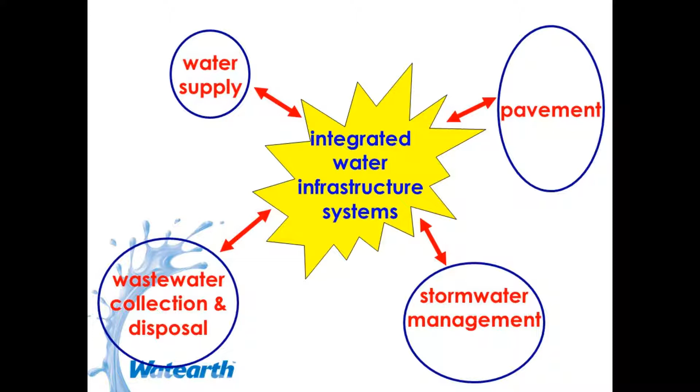I'm going to start with the Los Angeles Zoo. I won't go into a lot of detail, but it's a very fun project, and it illustrates the one water concept and really how to be sustainable in all aspects of water resources.

It's a very iconic place, located next to Griffith Park, in a kind of hilly area, and discharges to the Los Angeles River. Watearth was involved in the vision plan, which was really very fun. I got a lot of behind-the-scenes tours of exhibits and things that you never know actually happen or go on when you're not at a zoo. There's a lot of mechanical and civil systems that you don't see when you're just there looking at the exhibits.

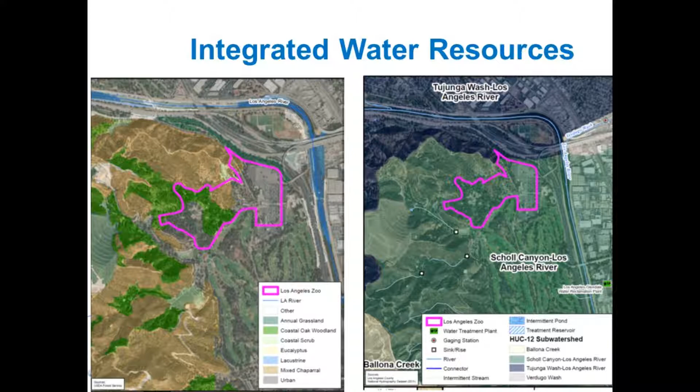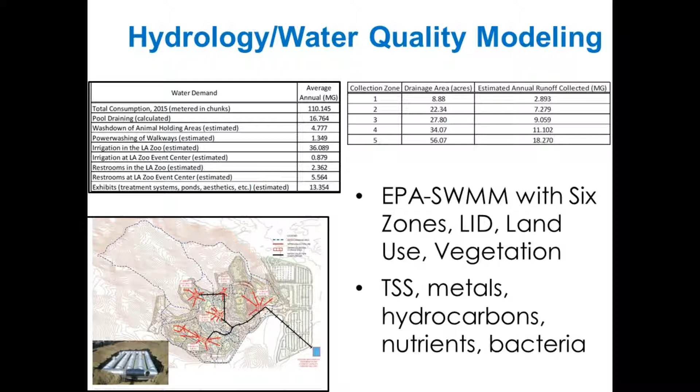So we're now in the EIR phase for CEQA, and we're not too far into that, so I can't share a lot of results right now. I'm going to focus more on what was planned in the vision plan. Basically the idea was to take the zoo and divide it into 6 zones or drainage areas, and try to capture all of the stormwater runoff from the zoo, then store it underground and ideally reuse it for irrigation or other needs like toilet flushing within the zoo. There's actually huge potential for that there, but potentially discharging some with treatment or to the water recycling plant. Any stormwater that's just discharged needs to be cleaned up and treated before it goes into the LA River.

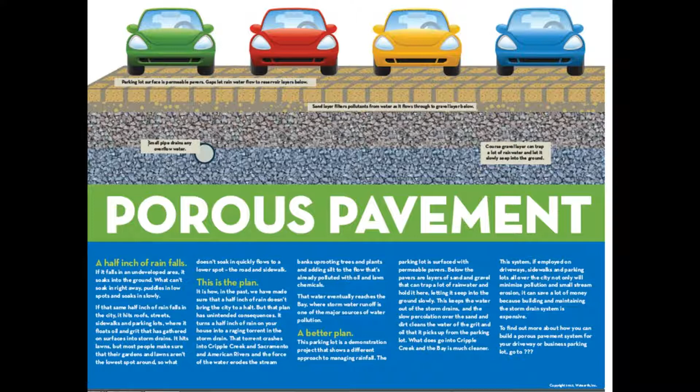So the existing parking lot actually already has LID features. It was recently upgraded, so it has porous pavement. This is from an interpretive sign from a project we did in Citrus Heights in the Sacramento area. But in any case, they've already got kind of a start towards that sustainability element.

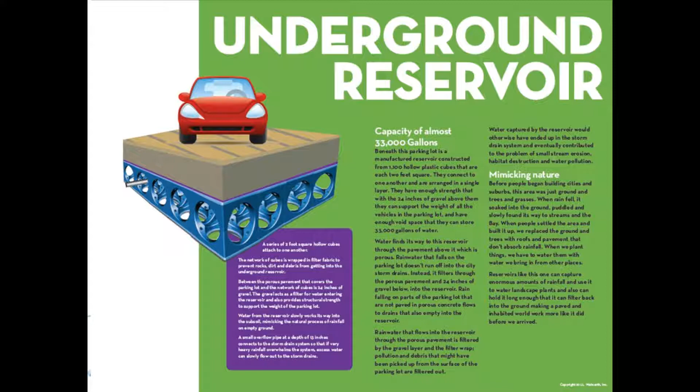This is the existing site I mentioned, so it has permeable pavement and bioretention. It's really ideal to leverage that and bring the sustainability and resiliency. I might not say resiliency a lot today, but anytime we use low impact development or these multi-use features, we're really building resiliency into a project. The soils within the zoo are actually pretty good in terms of if we want to infiltrate. The idea is first to try to reuse the captured stormwater on site, but potentially there might be some infiltration.

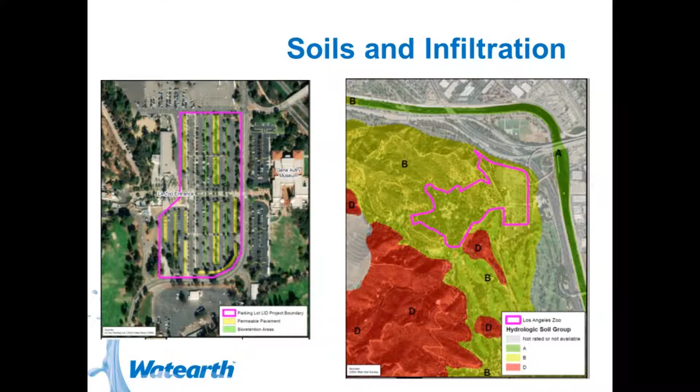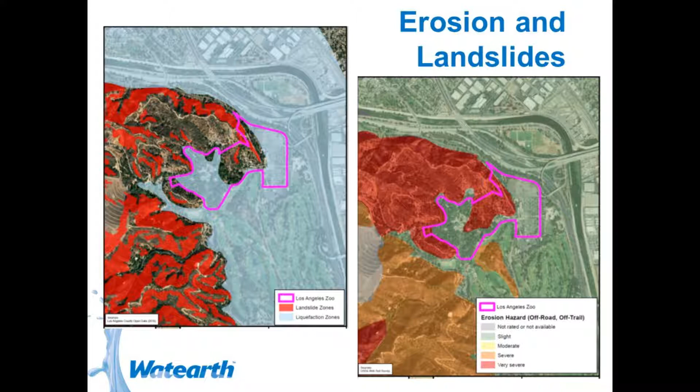So it is pretty hilly. The erosion potential might not be as bad as we thought. They're looking at the geotech right now, but it's potentially underlain by bedrock. So we'll see on that.

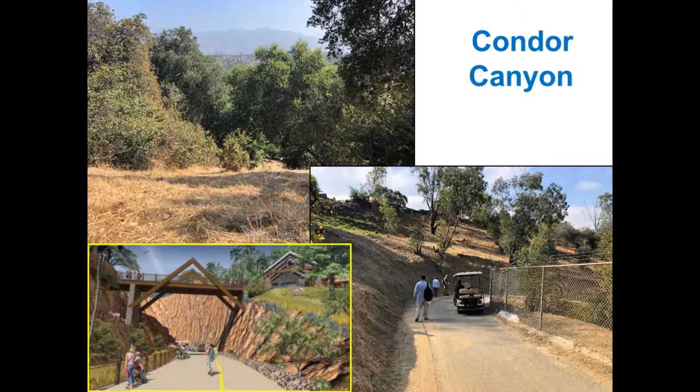All of the facilities, like where they have pools or tanks, have different operating protocols. Some of the pools, like the Hippos, are very dirty, so they get emptied every day. Some pools, like the Lions, not so dirty, so more like weekly. Some can even be on an annual basis. So they all have different operational protocols based on how clean or dirty the water is.

Animals that are on life support systems - it's not what you think of for life support, like a hospital. It just means the water is highly filtered, not that dissimilar to drinking water or even stormwater filtration on the industrial side. That water tends to get saltier. It's a little bit harder to reuse for irrigation or other needs, but it's also constantly recirculated. There's also USDA regulations that don't really allow recycled water to be used in those types of exhibits, so there's some regulatory complications we'll be working through.

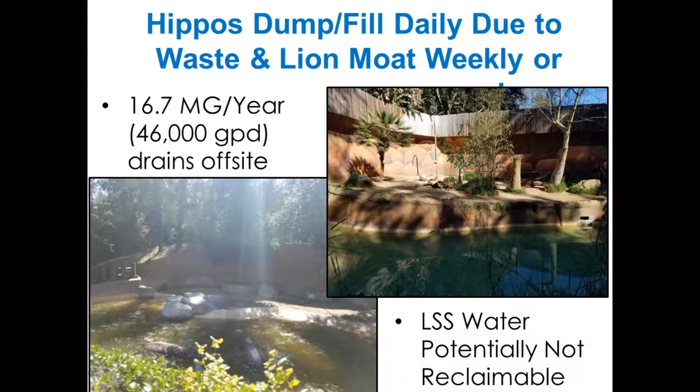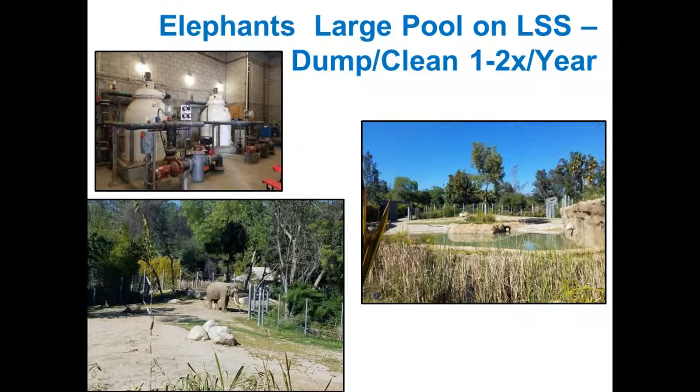Here's some of the mechanical water-related equipment behind the scenes in the elephant exhibit. The waterfall just recirculates. So they're already doing some things that are pretty sustainable in treating and reusing the water, but there's definitely more that can be done as the zoo redevelops.

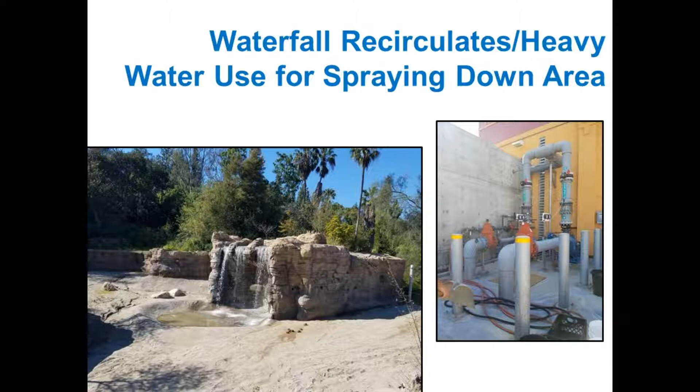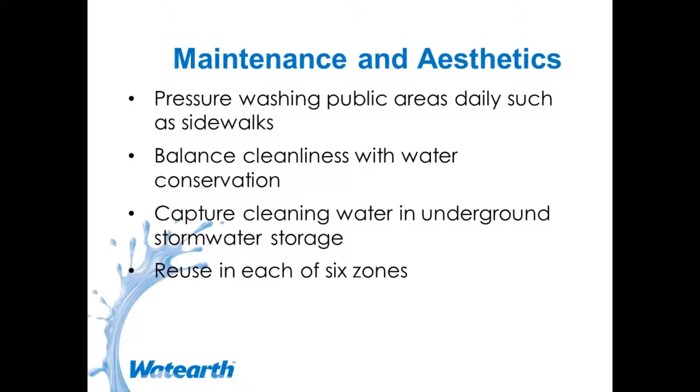It gets really dirty, like the sidewalks have to be hosed down, both because they're potentially dusty, but also you have a lot of traffic, spills and other things. That water currently is just used for cleaning once and then wasted. So with the stormwater capture concept, even the cleaning water would be captured.

And then irrigation - while we're all used to wanting low water use plants or a mix of low and medium, maybe a teeny bit of high water use, in a zoo environment they're really trying to match the plants to the exhibit. So in some cases you might not really use a desert plant or an adapted California plant - it may be more of a tropical plant.

So looking at increasing the efficiency of irrigation, where can we use either recycled water that's available or stormwater that's captured and treated on site. Excess irrigation water is an important potential stormwater runoff pollutant issue, because anytime we have excess irrigation running off, it's potentially carrying fertilizer and other nutrients. So there's some management items as well.

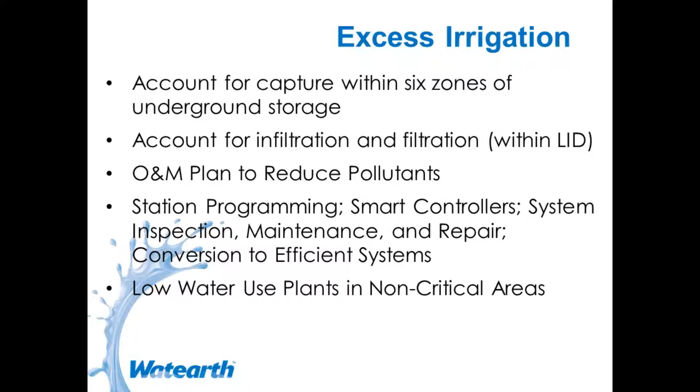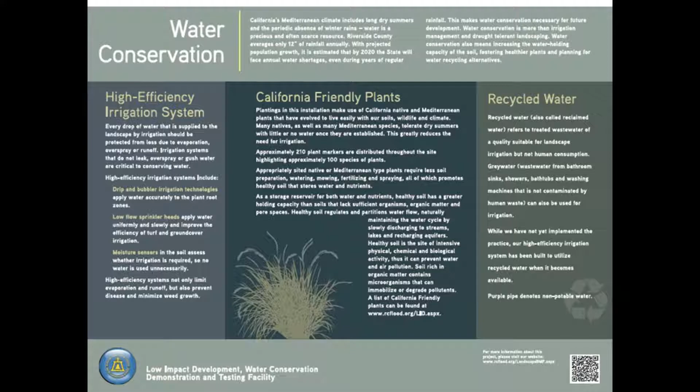But from a water conservation standpoint: high efficiency irrigation, low water use plants where it makes sense or California friendly, and then recycled water or captured stormwater.

This interpretive site and bioretention element is from the Riverside County Flood Control District. This is a demonstration site that's won probably a dozen awards now, and they just recently won an additional ASCE award for retrofitting the site and continuing to monitor it.

Elements like communications, graphics, and interpretive signage are really important components of these types of projects in terms of educating the public. It also helps, whether it's a public agency or a private client or Cal Poly, it can help to brand what the agency is doing that is sustainable and resilient.

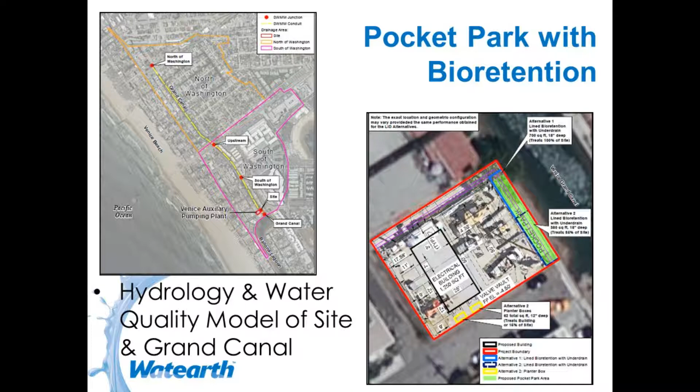This is a site level project in LA, but it has watershed level significance because it's at the confluence of the LA River and Arroyo Seco. It's called Confluence Park Phase 2.

Phase 1 was done a couple years ago, it's been constructed. Phase 2 is basically in a cloverleaf of an intersection. So this is up on a bridge looking down at the site. Unfortunately, for stormwater, it's being used as a staging area right now for sanitary sewer pipelines and improvements.

What that means is we've just finished community outreach and we're now moving into preliminary design. Available geotechnical data is not that great because it's not accounting for the compacted nature of the site. So we do need site-specific geotech, but it also means we're starting with a very compacted site.

So we have to look at not just what's going on in the upper layers, but also further down, especially because we're looking at opportunity for stormwater capture and whether it can potentially be infiltrated or maybe reused on site. I don't think the water budget's going to work out for that, so we'll be trying to look at infiltration if we can.

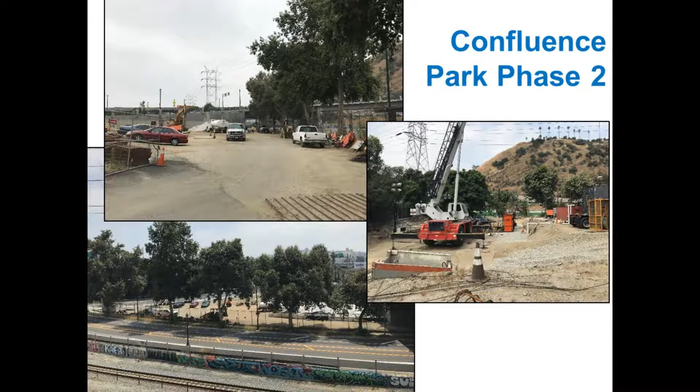Basically, this is kind of a sculpture area. The existing park is over here, and then these two segments of the proposed park are located in here. You can see on the historic FIRM map where it is in relation to the river. So it's super highly urbanized, but it's a great opportunity to provide outreach and connectivity for the general public.

Most likely the heavy users might even be bicyclists who are riding the LA River Trail and stop off to fill at the water bottle stations.

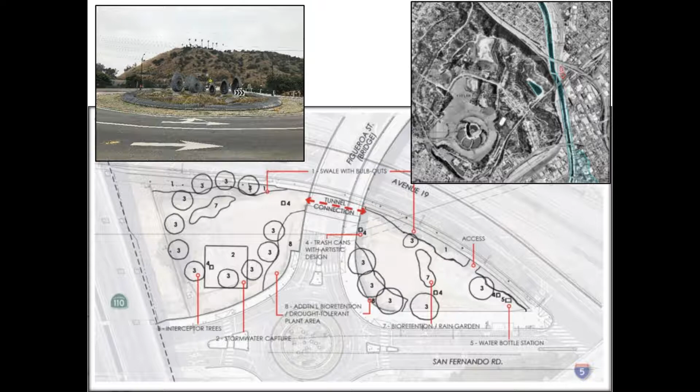Up in the Bay Area, Oakland Fire Station #1. Again, this is very site specific, it's a retrofit at a fire station. But the whole reason this project came about is that there was a water quality violation, and so this was kind of negotiated as part of their MS4 permit agreement to do this project.

So it has an important role in runoff from this site, but it plays a greater role in even just education of city staff and improving water quality within the watershed.

So when we talk about resiliency, there is sometimes a need to design redundancy into features. So this is a permeable pavement driving lane, and it actually ended up being less expensive than traditional reinforced concrete to carry the fire truck load.

But we also know the city expects the fire department to do all the maintenance. Well, the fire department is not going to get out there with the vacuum sweeper, which is what needs to be done periodically. So this permeable pavement could clog at some point if not maintained, and we kind of don't think it's going to be.

So there's a slot drain in here so that any overflow or excess flow is captured and discharged into a bioretention area where it provides the required water quality treatment. So we have safety factors, or redundancy in there, so it is a resilient feature even with less than ideal maintenance.

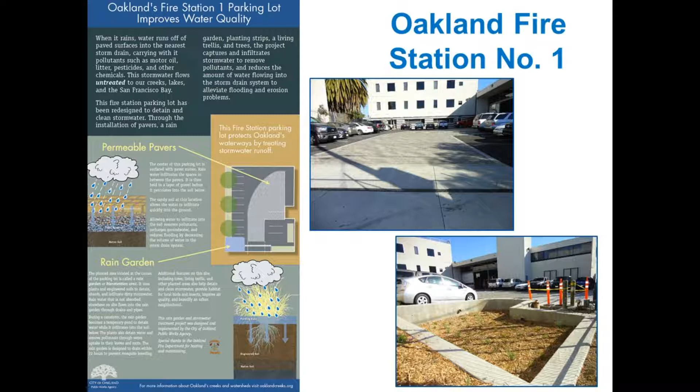LA Metro Transit Authority, similar to LA County, is really trying to push for more sustainability, more envision, cutting edge projects. This particular project received a grant.

It's a permeable concrete demonstration project at a maintenance division. So when you think of transit authorities, they're kind of industrially, transportation oriented. It makes it a little bit challenging for green infrastructure.

But this is constructed in a parking area. Basically 39,000 square feet of porous concrete will treat 251,000 square feet of contributing surface area for this project. And the goal is to treat the 85th percentile event.

So any overflow drains into the bioretention. The plants are really tiny right there, so you can hardly see them. And this overflow inlet does not have the top on it yet. And then any overflow from that ends up draining into an infiltration trench.

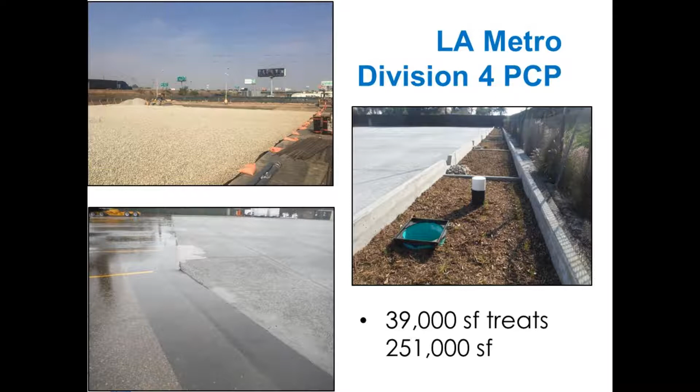Another grant project that was funded, the whole premise was to help improve water quality within the watershed. However, most of these projects are multi-benefit. So water quality within the watershed, is it improved from the site? Yes, it is. But the school district gets extreme benefits, which we'll see in a minute.

Parking lot project: because of the soils and the rainfall, we were essentially able to infiltrate the 100-year event and all of the annual runoff. That doesn't happen on every project, but there is that possibility when things line up. When they don't, that's okay. Regardless, even when there's minimal infiltration, we still get the water quality filtration benefits.

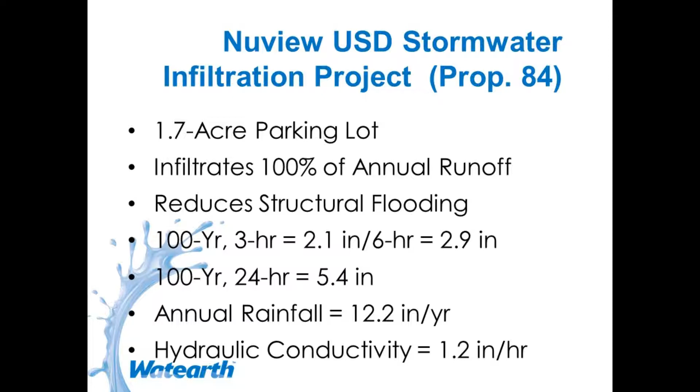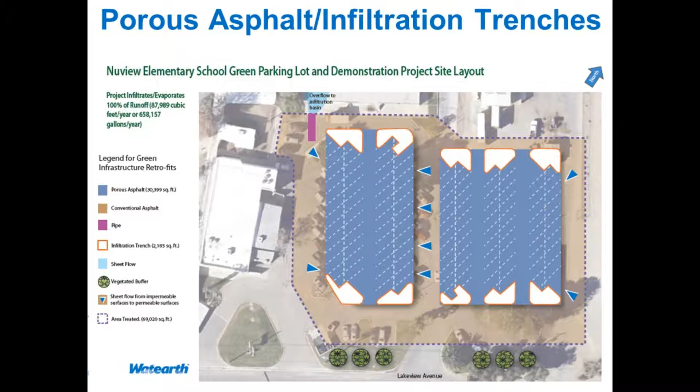So the idea was to take this existing parking lot. The building had some structural flooding issues because of the way it was graded. To redo the grading, we put in porous pavement parking areas and some infiltration trenches. Personally, I would have rather had bioretention, but the school didn't want bioretention - they wanted to minimize their plantings for maintenance reasons. Any overflow was directed onto a playfield so it could further infiltrate. It's always important, just like a regular flood control facility, to have our emergency overflow paths worked out.

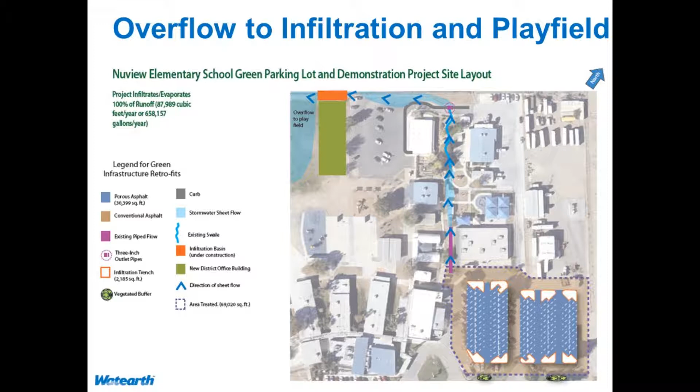One of the design considerations here is these rocks in the infiltration basin are pretty big. They wanted big rocks so the kids couldn't pick them up and throw them. They're elementary school kids, so I don't think they can pick these up. Now, if they do, it's going to be really bad.

And then there's solar in the background. So the school district got a nicer parking lot, which helps meet water quality benefits.

Question: It looks like loose gravel, is that pavement or something? Answer: Yeah, the quality on this isn't showing up very good on the projector, but this is conventional asphalt, and this is porous asphalt.

And I'm out there to give you a little bit of scale. One of the things that happened during construction - grant projects are always slightly difficult. We were not engaged for construction-phase services because a lot of times, especially schools, want to provide those services themselves, and then there end up being issues they don't know to catch. A lot of times we'll catch them in the photos they send, but they didn't send photos of this. So the rocks are stacked up too high. Ideally they should have been lower to allow for water to pond in there. We checked it in the model and it still works okay, but it would have been better had it been built like that.

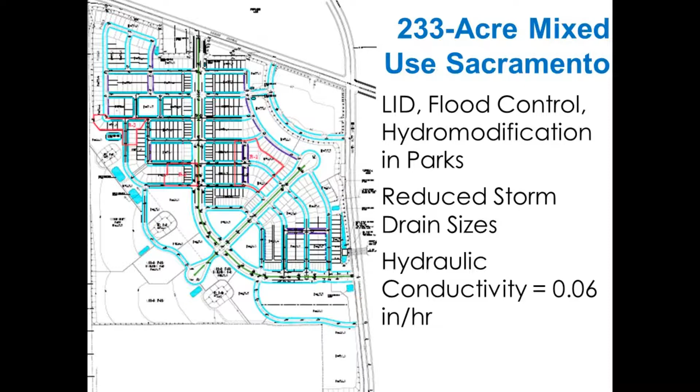Question: Are the red and the purple also stormwater facilities, or what? Answer: The red shows different drainage area boundaries. The turquoise is essentially just either bioretention or vegetated swales, and then the bigger ones are hydromodification management facilities - kind of deeper bioretention, but trying to control more volume.

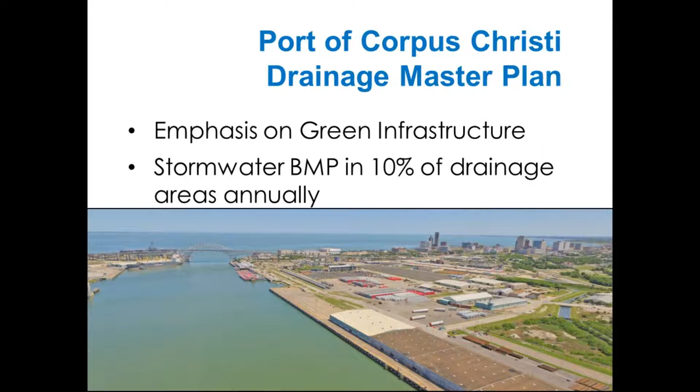And I'm excited about this one. We have not started yet, we're just scoping. We just won a drainage master plan with the Port of Corpus Christi, which it seems like - why would a little port in Texas be doing anything very sustainable? But they're actually one of the larger ports in the country, and they've won a lot of Green Marine awards. So we're going to be looking at, on a master plan basis, incorporating green infrastructure and other stormwater BMPs throughout the port. So ask me about this in a year, and there will be some fun stories to tell.

Up in the San Francisco Bay Area, this was worked on with the San Francisco Estuary Institute, where we developed a green infrastructure GIS-based siting tool.

So the tool has things in it like—we've gone back and added multiple times—planter boxes, wetlands, vegetated swales. I think we even put detention in it.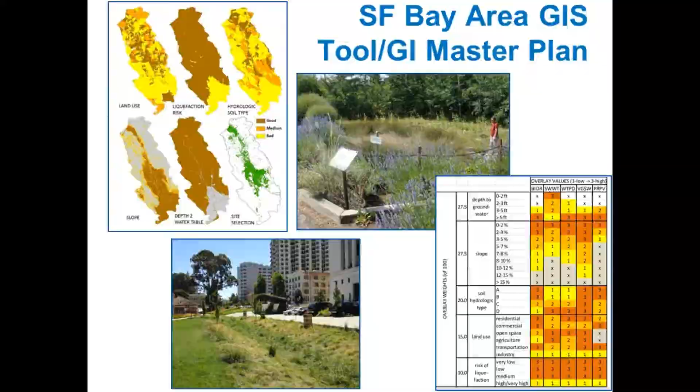Next phases were specific watershed modeling in the Sonoma Creek watershed, modeling within the city of Oakland, within the city of San Jose, looking at water quality improvements, and then developing a master plan for green infrastructure.

The very first watershed we modeled was rural and pretty undeveloped. What we found was, as expected, extensive implementation of LID was going to bring down peak flows within that watershed, and of course improve water quality too.

We did some further analysis to set the stage for optimization. And of course, if you have a more developed watershed, implementing LID will show an even greater reduction in runoff volume.

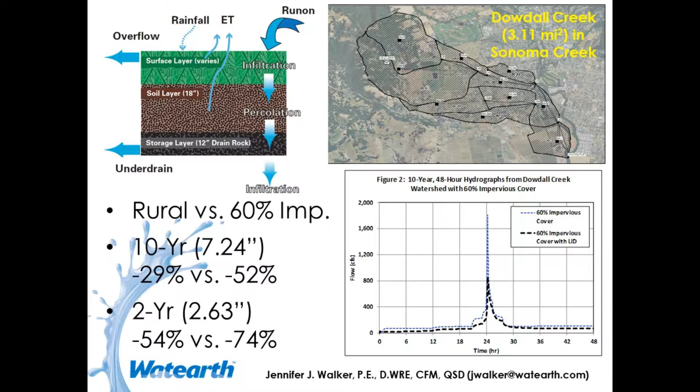This is a retrofit adjacent to a flood control channel. There's a dog park within here. So what types of pollutants of concern might we have from a dog park? Fecal coliforms, nutrients, maybe trash if people are throwing their trash—who knows.

The idea was to retrofit the swale alongside the flood control channel, which accepted sheet flow runoff, so it could treat the runoff and improve water quality. The reason there's a swale is because if the runoff just goes right over the side, you start to get erosion over the side of the channel. Monitoring is being done now, but we looked at vegetated swale portions and bioretention portions within this system.

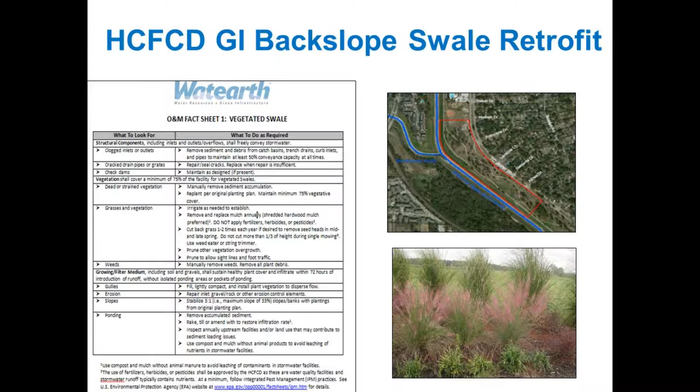We then did modeling of that in SWMM and looked at the reduction. This was focused more on hydrology than water quality because the whole area basically floods in like a 2 to 5 year event. So we were looking at incorporating green infrastructure to help improve the level of flood protection in smaller events, in conjunction with gray infrastructure.

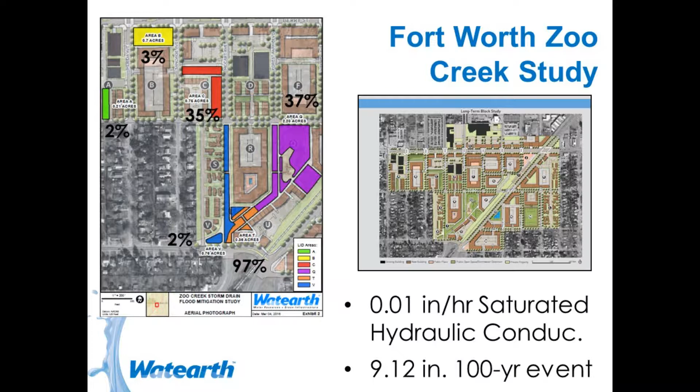More on the larger watershed side, I started on this project probably about 12 years ago, which was a regional stormwater master plan that looked at all the watersheds within the city of Houston and identified regional flood control facilities, but also opportunities to improve water quality, whether that be green infrastructure or other methods within the flood control facility. This was the first project that ended up falling out of that and going into construction.

We tied it into a CIP roadway design project, but basically diverted flows out of an existing stream to provide some regional flood control. We did wetland plantings in the bottom of the basin, tied that back into a regional flood control facility so that it expanded habitat and ecological benefits.

It's right adjacent to a park which is used very frequently by a community that's really in need of parks, but there's a lot of people that go out and walk. So we looked at expanding the tree canopy coverage, which helps with the urban heat island effect that Rebecca talked about. It also provides more habitat and makes it a lot more pleasant to walk along the basin, so incorporating trees along the basin is part of the walking path.

And again, the signage is just to educate people on what's going on, and hopefully it helps preserve the life of the facilities, like don't throw trash in it and things like that.

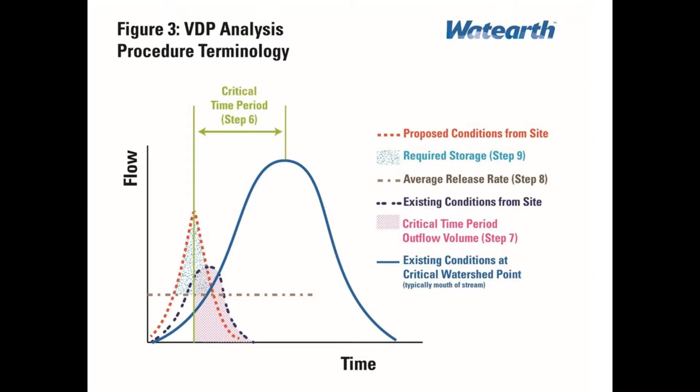Then there's more of a statewide study. What I liked about this natural channel design study is we worked with Lee Forbes, who's at SWCA now, used to be at KBR, and some of Stantec's national experts on natural channel design. We looked at whether it's applicable for all seven physiographic provinces of Texas, and yes, it is. It's applicable for most types of topography, you just have to customize it.

Natural channel design is great to handle a certain circumstance or level of development. Say your watershed is 50% developed and you want a stable, more natural channel design to handle that. But that doesn't address future development, and that's where low impact development can go hand in hand with it, so we can have improved watershed health.

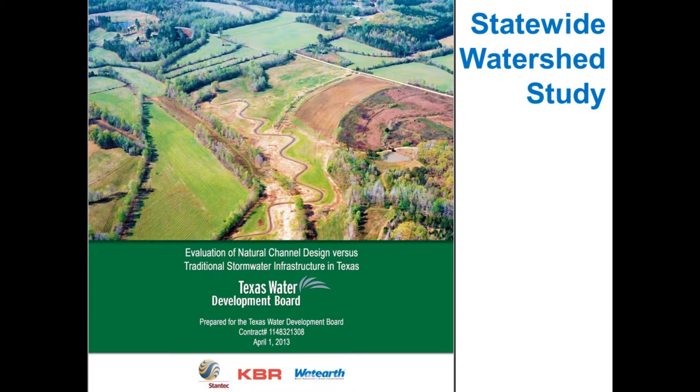Then down to LA County, lots of stormwater capture projects happening right now. A lot of them are at park sites, which is a great double use of space. This is one park site, so you've got the playfields and ball fields, but also a lot of surface area in a very expensive real estate market. If we can go below that and get the stormwater capture...

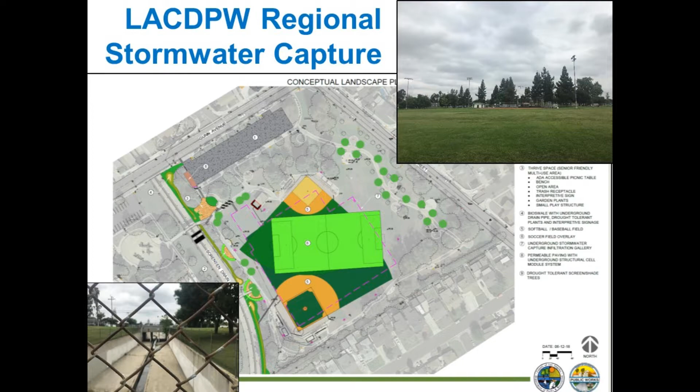At Cal Poly, lots of really good things going on the sustainability side. We've been working on the master plan EIR, more on the water and wastewater front for this project. Cal Poly is doing a lot of great things, they've already implemented a ton of water conservation, both indoor and outdoor, and they're also looking at recycled water.

These types of things aren't stormwater specific, but they affect stormwater, because when we use water conserving facilities and more efficient landscaping, you don't have the excess runoff. So we have less nutrient runoff and things like that. This is a perfect tie to that systematic, systems approach where we tie all the water systems together.

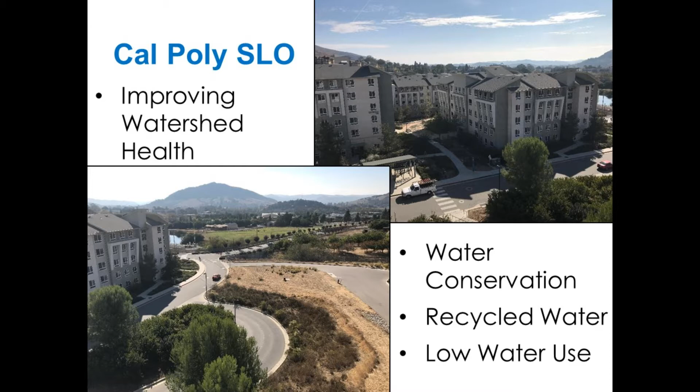Just a few final thoughts. There are a lot of excellent opportunities to tie together flood control, water quality, and erosion control. It doesn't have to be within parks, but parks do present a really good opportunity for a double use, or more resilient use, of land.

What I haven't touched on much is the modeling for the regional facilities. It's not just plop it down and hope it works, we need to have the numbers behind it and do the modeling to show we've got an optimized system with a good return on investment.

And I haven't talked a lot about O&M, but it's super important. Rebecca talked about some of the triple bottom line, so when we do that type of economic costing, we want to look not just at what it costs today, but plan for the maintenance so facilities last as long as possible, function as well as possible, and can be rebuilt at the end of the life cycle.

Okay, and with that, I'll open it up for any questions or comments.

And I am ENV SP certified, so... and a bunch of other things. But yeah.

All right, awesome. Okay, thank you. I appreciate it, interesting project. Thanks, Jennifer.